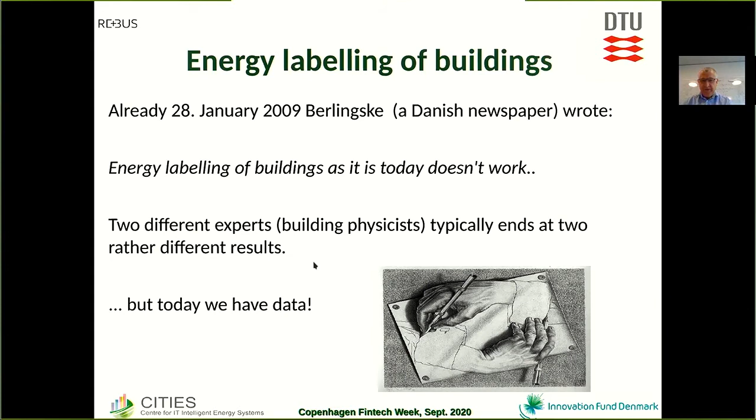Some of the problems for the experts visiting a house for providing an energy label, for instance, is that he's not able to see the hidden layer of the buildings.

Here is an example where we actually have two buildings of exactly the same wall construction. For the one on the left, the heat flow through the wall is rather high compared to the wall on the right. The theoretical U value, which is related to insulation, is 0.16. If it's done in a nice way, then we end up, as we can see on the right, with U 0.21, whereas we are able to see in some cases that the heat loss can be 4 or 5 times higher.

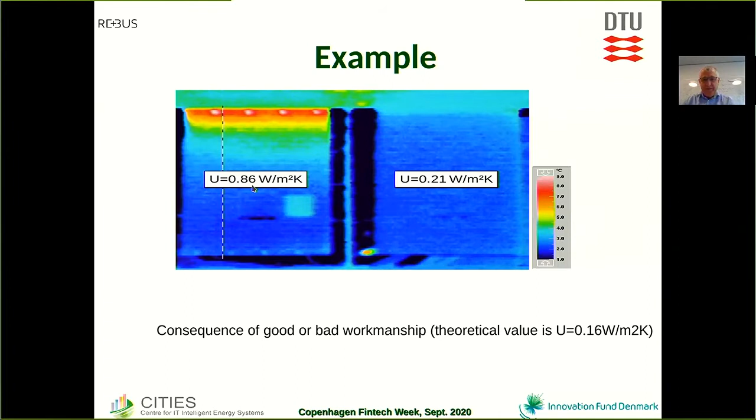This fact, that the energy consumption of buildings in many cases is way higher than predicted, is well known. This is an investigation which was carried out in the UK with 18 different dwellings, and we can see that in many cases the measured heat loss was twice as large as the predicted heat loss.

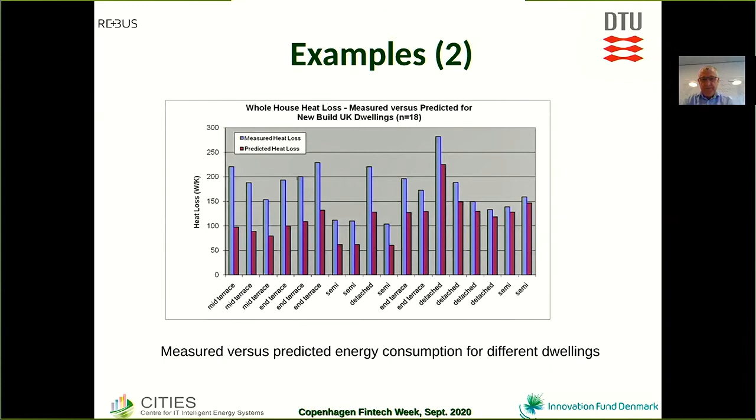We also know that previously the support scheme for energy efficiency and providing financial support for renovation of buildings and so on has been based on tables. It was concluded 3 years ago by a report from the so-called Rigsrevisionen in Denmark that this support scheme doesn't really work, and a new method has to be introduced.

What we suggest are data-driven methods which will lead to evidence-based and automated procedures. Our procedure consists of three steps or elements. One is a screening element in which we can find the buildings which have the highest potential for building renovation. The second is methodologies for providing automatic suggestions on how to upgrade individual buildings. Number three is methods for verification of the obtained improvements after, for instance, a renovation project.

We do also suggest to introduce data-driven methods for energy labeling, which can be done automatically in the cloud. So it's much easier and will be way cheaper for the house owners.

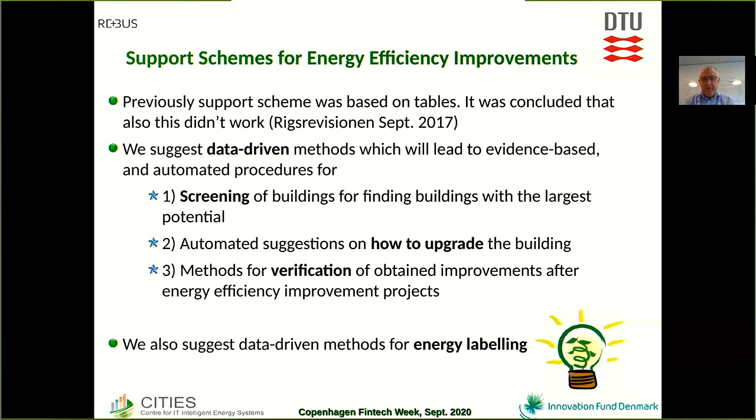One important element in our procedure is that we are able to take the meter data and separate it into something which is due to hot tap water consumption and another part which is due to heating. The part which is due to heating can again be separated into a part which can be linked to the characteristics of the house, and another part which is linked to the user behavior.

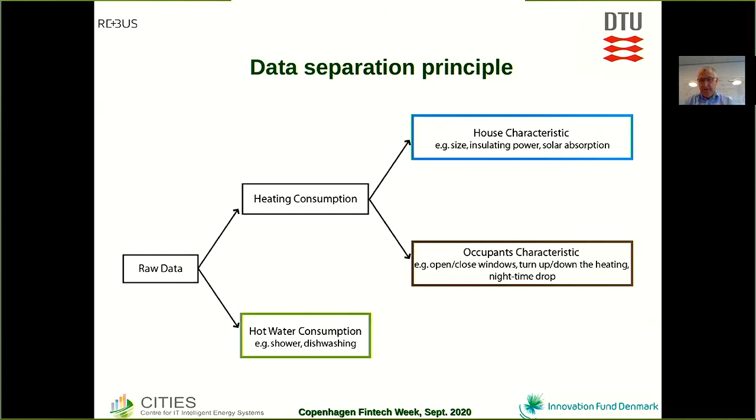Let's consider how we are using the meter data for energy performance characterization. Let's first look at the options for energy performance characterization.

One option is energy labeling. Another is estimation of UA values and gA values. UA values say something about how well insulated the building is, and the gA values say something about how well the windows are designed with respect to taking advantage of solar radiation, so it's related to solar gain. We will also be able to provide a more detailed energy signature of the building, which expresses different characteristics, like how sensitive it is to wind speed and things like that.

Furthermore, we'll be able to characterize the dynamical characteristics of the building. As an important part of that, we will be able to estimate the time constants of the buildings, which are very useful for future smart control of buildings.

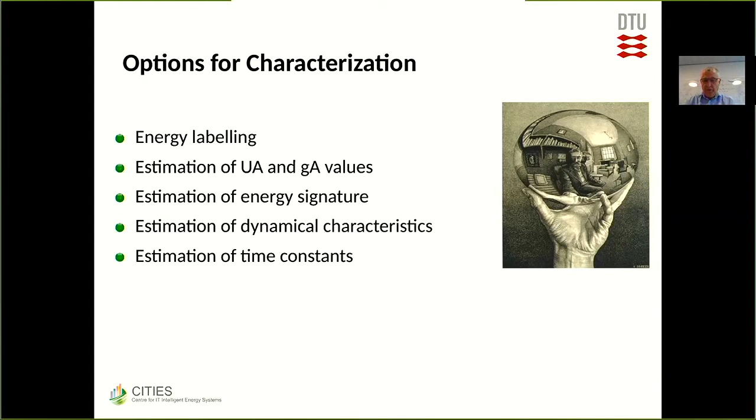These are some examples from Sønderborg, where we analyzed something like 50 houses with district heating. Due to GDPR, we just have the numbers on the left - one number is related to a house. The only data we have here was frequent meter readings, and then meteorological data: outdoor air temperature, solar radiation, and so on from the airport in Sønderborg.

I will not go into detail here, but what we can notice is, for instance, we are able to estimate a characteristic indoor air temperature for the individual families or individual buildings. We are also able to see this wA...

...express how sensitive the building is to wind speed coming from east, south, and west. In this limited amount of time when we had the data, we didn't have any wind from the north. That illustrates one of the drawbacks of data-driven methods: if we don't have data, we're not able to come up with numbers.

What we can see from this table, we can see a lot. One of the things is that this building has a much higher consumption when the wind comes from the west than when it comes from the south. If we look at the drawing of the building, it seems to indicate that there could be some problems with a door or window which is untight on the western side of the house.

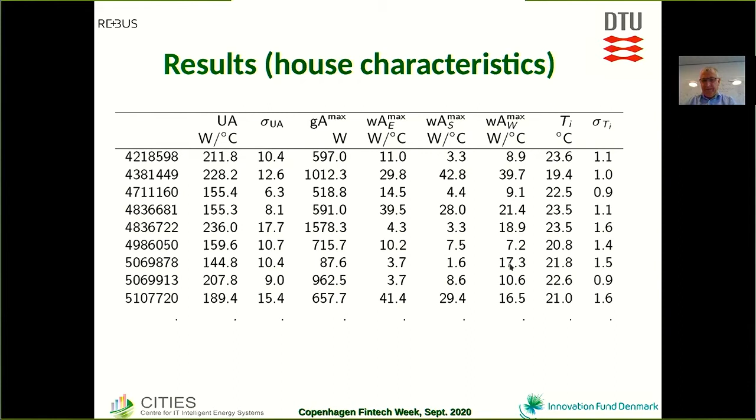So there are a lot of perspectives in this setup and in using frequent meter readings. One is, of course, to find the most problematic buildings by the screening procedure, as we mentioned before. Another thing is automatic energy labeling, or digitalized energy labeling.

And then if we zoom in on the individual houses, we will be able to see from tables like the one we just saw: should we replace the windows? Should we put more insulation on the roof or in the walls? Should we tighten the building in general? And so on.

And with the time constants, we are also able to provide information which can be used for better control of the heat supply.

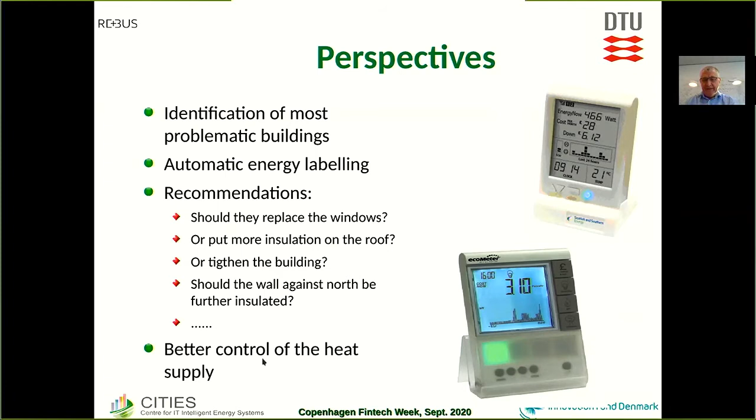This is just to show data from Middelfart in Denmark - three different houses with time constants, in houses where we have a night setback. What we can see in general is that buildings are characterized by temperature dropping rather fast, and then later on a little bit slower. So in general, a building needs two time constants in order to characterize the dynamics.

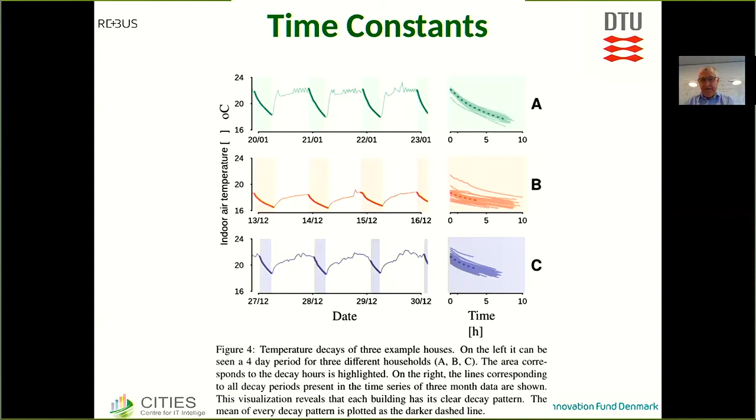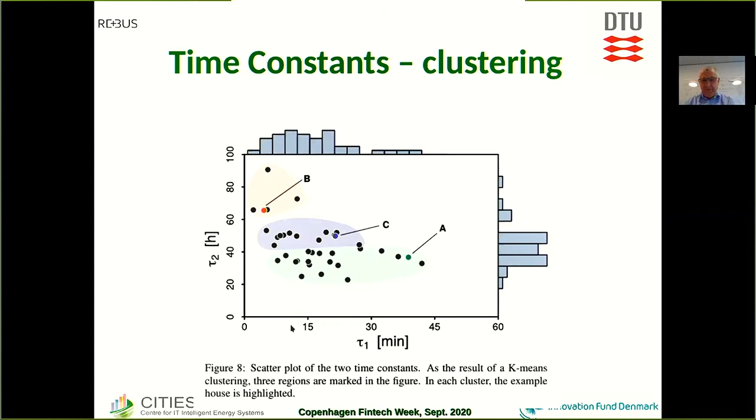This clustering involved something like 40 to 50 buildings in Middelfart. Here we can see that the buildings can be clustered into three different categories based on these two time constants, tau 1 and tau 2.

Let us zoom in a little bit on the models we are looking at. The models we have are rather simple, equivalent models for describing the dynamics of the building. This shows a building where we will zoom in on the solar radiation in this example.

The solar radiation hits the window, and then a part of the solar radiation is absorbed and transformed into heat, another part is reflected, but also some goes into the house. We also have heat from radiators and heat loss to the outdoor air temperature. In order to describe the characteristics of this building, we set up an equivalent simplified model.

This model contains some important parameters or states. Some of the hidden states, which we don't measure, are the temperature of the floor. This building is characterized by having a rather heavy, thermally heavy concrete floor, but the wall is rather lightweighted. So the thermal mass is represented by the floor, and one of the hidden states is the heat stored or accumulated in the building, which is then stored in this thermal mass. This temperature is not measured, but we can estimate how much is accumulated.

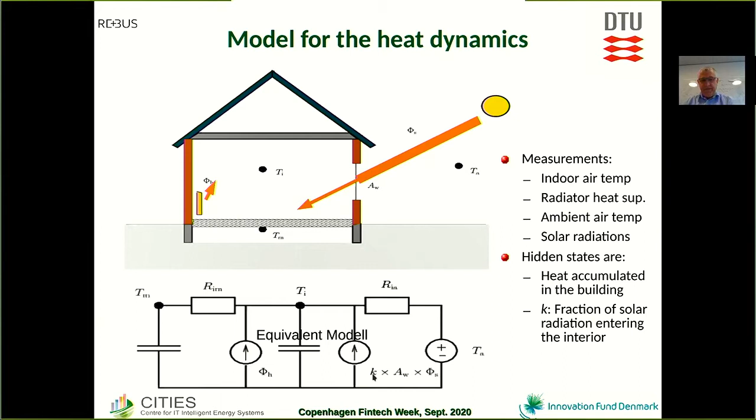If we do an online estimation of that fraction, this can actually be used for setting up a support for showing when the windows have to be cleaned.

If you have it like I have it at home, I'm the one responsible for cleaning the windows. Before we had this system, I always thought the windows were crystal clear, but my wife always claimed that they were dirty. So we discussed it from time to time. But now we just look at the K values, and when the K value is less than 0.6, then I clean the windows, otherwise they are clear.

It's also evident that we could use even more data. What we talked about so far was just using the meter data, which we have available today in most houses. But if we can have more data from the building, then we can also have more information.

Let me try briefly to outline some of the perspectives and also link that to some of the models we are using.

At the first level, we are using just energy use data, like we did before, the energy meter data for total space heating. For the weather data, we typically need outdoor air temperature, solar radiation, and wind speed and direction. This can give, as we just saw, the heat loss to the surroundings and the time constants.

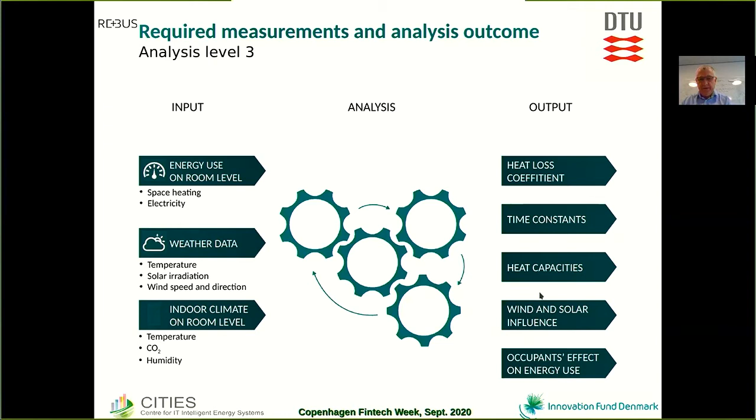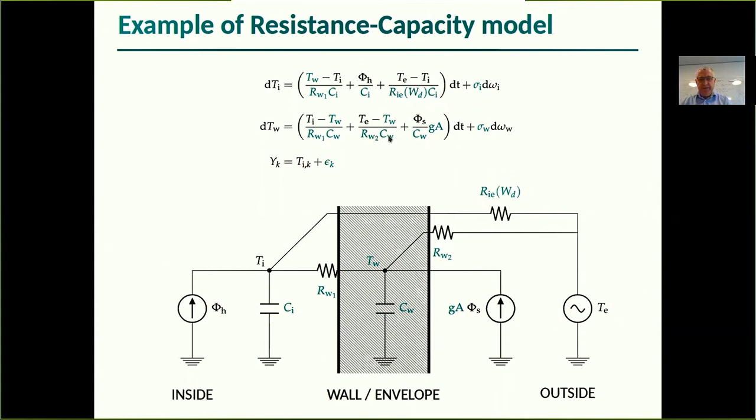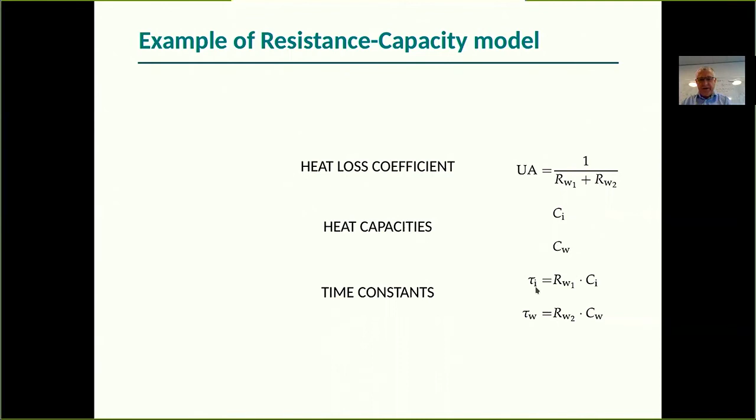This is just to show one example. I will not go into the details, but these are the models we are zooming into, which we estimate using our AI methods. Based on the parameters in this model, we can estimate the heat loss coefficient, the heat capacity, and the time constants. I will not go into the details, but I just think you should see a few equations.

What we tend to do is develop and implement that as a cloud solution at the new digitalization hub for energy systems in Denmark, and this hub is called Center Denmark.

Center Denmark is a digitalization hub for accelerating the green transition based on IT, digitalization, communication, and so on. Center Denmark is located in Fredericia, very central in Denmark and very close to some of the most important players in the Danish energy systems, like Energinet DK, the Danish District Heating Association, and some important power suppliers like Ørsted and EWII, who also have their headquarters nearby.

What we do at the Center Denmark platform is establish a trusted data sharing platform. Here data should be understood as both classical data like numbers, but also software - so we share both software, algorithms, and conventional data. And of course, we put labels and tags on the data so we are able to control who has access to this and that data, and who does not. So this is a trusted data sharing platform, or economy, you may say.

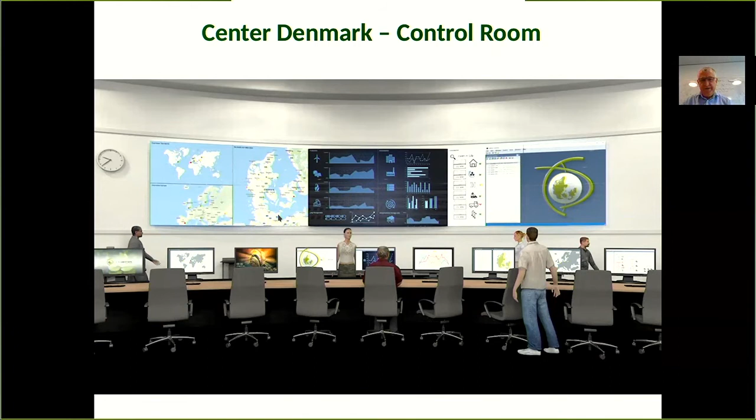The control room of Center Denmark will look like this. The important thing is that we can zoom in and out, so we have a spatial zoom functionality where we can zoom in on the individual buildings. We can also zoom out and consider a whole city or just a district of the city.

What we do also in Center Denmark is we have created a Unilab.dk consortium, where we have a number of municipalities in Denmark. I think we have 8 or 9 for the moment, and we also have the bigger cities like Copenhagen and Aalborg in this setup, because we would like to test and develop these procedures further and do it in a way so the conclusions are representative and scalable. So that's why we think this concept of Center Denmark together with the Unilab DK setup is an interesting setup. I will stop here. Thanks a lot for your attention.

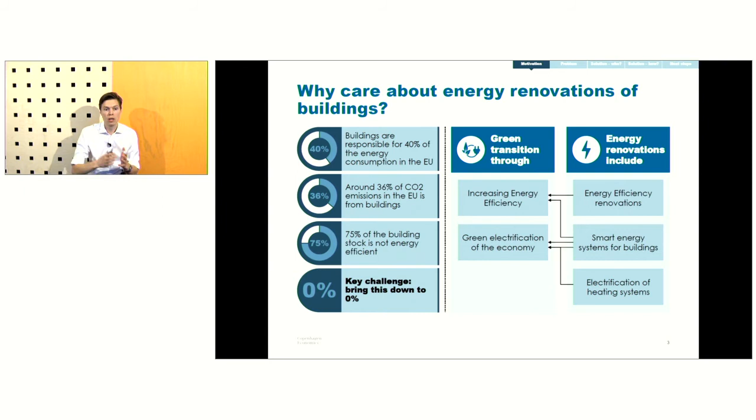The idea here is that we need to electrify heat production and make it run on green power in order to complete the green transition. So it doesn't matter if you have a very energy efficient building if you still have an oil boiler in the basement producing the energy—then you can never be carbon neutral. So both in terms of improving energy efficiency, which will shorten the distance to when we are carbon neutral, but also making sure that the energy being produced is entirely renewable.

The big problem is that households and companies today do not conduct energy renovations to the extent that is needed to be compliant with the Paris Agreement. And they don't do that even though it's often profitable for households and companies to do these energy renovations—meaning that the capital cost of lending for an energy renovation is often lower than the savings would be on an energy bill from doing that renovation. So households and companies can actually often save money by doing energy renovations.

It's rational, it's profitable for them to do so, but still they do not carry out these energy renovations. And this is what has been denoted the energy efficiency gap. There is simply a gap between how many renovations households and companies actually are doing and what would be profitable for them to do. That's obviously a big problem because it means we don't move on with the green transformation at the pace that we would like to.

It could actually be an even bigger problem in the future if future policy initiatives increase the incentive for green transformation and energy efficiency renovations. If these economic and financial incentives have no impact because households and companies do not really respond to them, that makes it an even bigger problem.

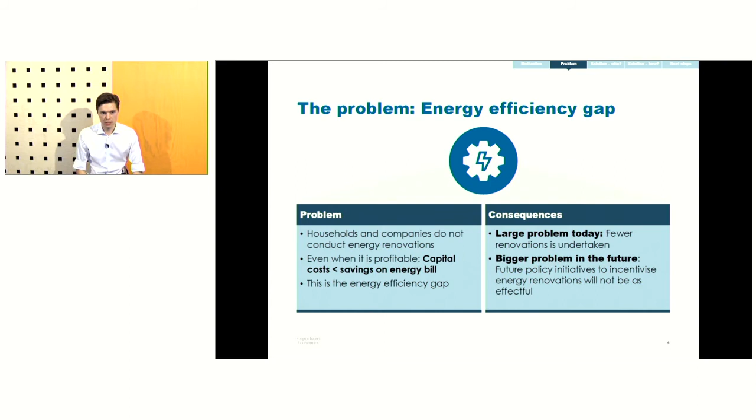This energy efficiency gap is not really new. It has been discussed for at least the past 10 years, and we as a consultancy, Copenhagen Economics, have made several reports on it. So the challenge is well known.

And so are, at least on a high level, the reasons why we have this energy efficiency gap. I think the most important obstacle currently is information to consumers—households and businesses simply do not consider making an energy renovation at any given point. It doesn't occur to them that there is an opportunity for profitable investment. If they don't even consider making it, no other solution matters. So step one is to make households and companies consider making an energy renovation.

Very much in line with that, we lack adequate data—that's also a lot of what Henrik talked about. We simply don't have sufficient data to identify which customers could benefit from an energy renovation. It's difficult to identify customers, and it's also difficult, due to lack of data, to verify the impact of an energy renovation after it has been carried out.